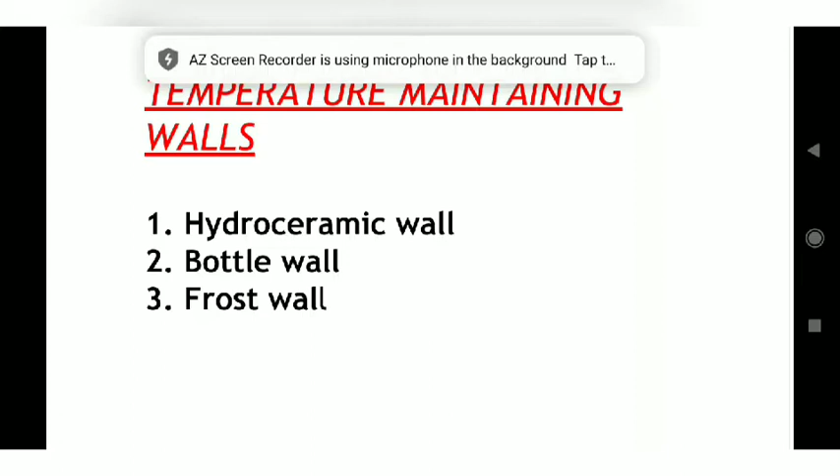We are going to discuss temperature maintaining walls. We are mainly going through three topics: first is hydroceramic wall, second bottle wall, and third is frost wall. First, we are moving through hydroceramic wall.

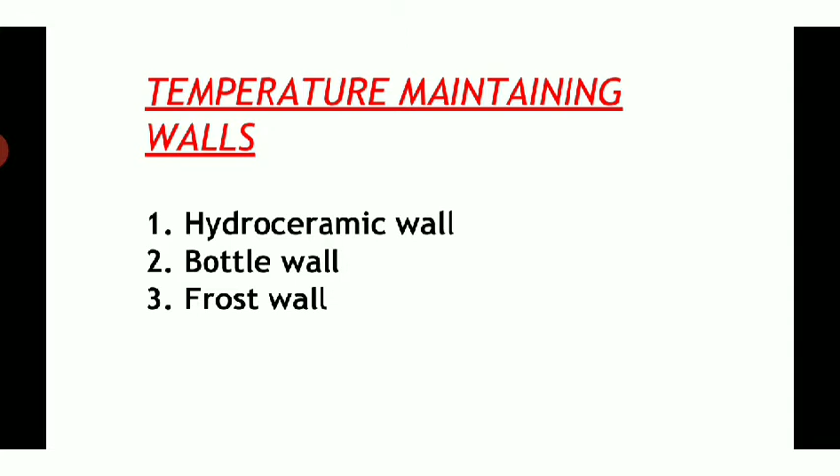We know that in our day-to-day life, the temperature is increasing due to the lack of rain, trees, etc. So the cooling of buildings is a big task for engineers. So hydroceramic wall is one of the best solutions for the cooling of buildings.

Hydroceramic is developed by IAAC, the Institute of Advanced Architecture of Catalonia. It consists mainly of three students, girls: Akanksha Rathee, Elena Mitrofanova, and Markopoulou.

The first point is, as I told earlier, it is speculated on thermodynamic process in buildings with the help of hydrogel. Hydroceramic requires mainly smart material and supporting material. Smart material like hydrogel, and supporting material like fabric as water channel and ceramic material.

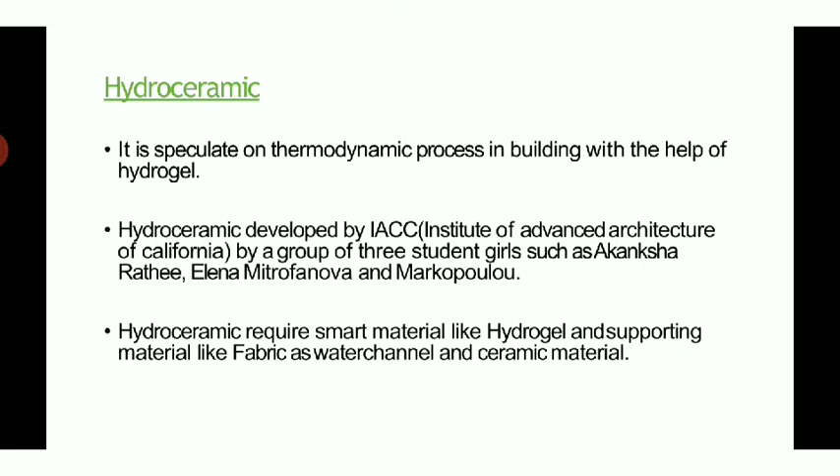First we want to know what is hydrogel. Hydrogel is a polymer which expands in water to 400 times its volume. So it consists of 98% water. It is very helpful for evaporation and it cools down the surroundings. There is a pictorial representation of hydrogel shown below.

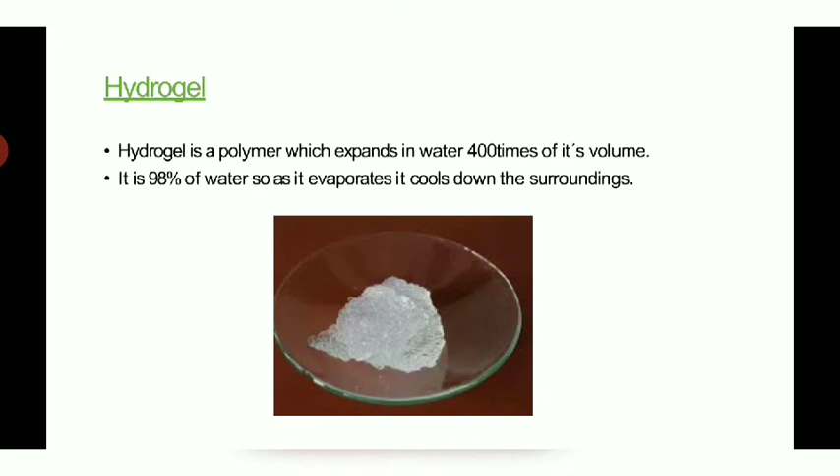Then we said that we need a ceramic material for the supporting material. So which ceramic material is suitable for the hydroceramic wall? That is a big question. Before that, there is a pictorial representation showing the heat of vaporization of water, which is about 0.6 kilocalories per gram.

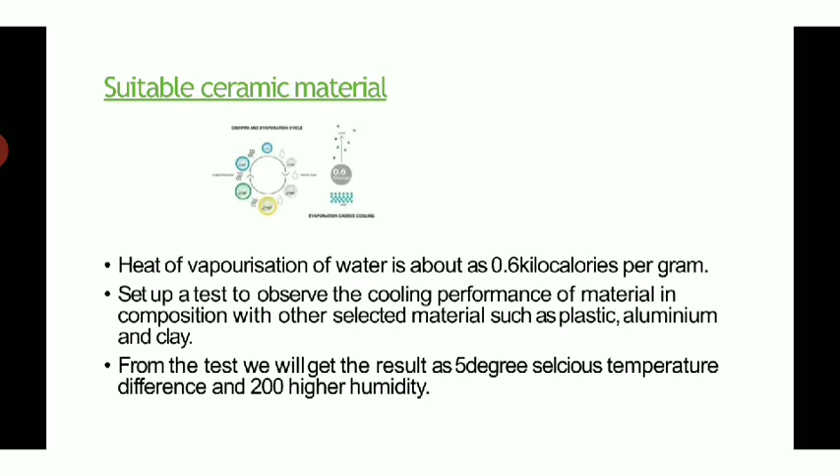Then we want to know which ceramic material is suitable. For that, we can conduct a test using materials like plastic, aluminium, and clay. After the test, we can identify a 5 degree Celsius temperature difference and 200% higher humidity. So by using composite material, we can understand that it has the ability to cool down the space and to transfer humidity.

So when we approach the composite material, we need the most abundant composite material in nature at cheap cost. When we approach it like that, we can easily prefer clay for the ceramic material.

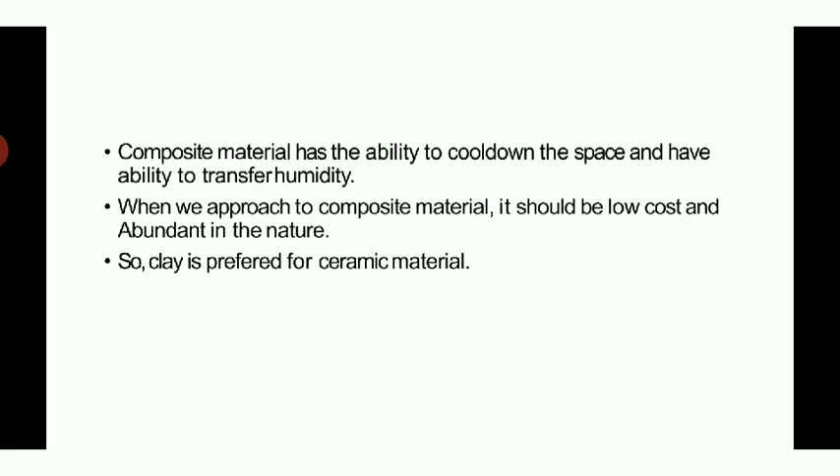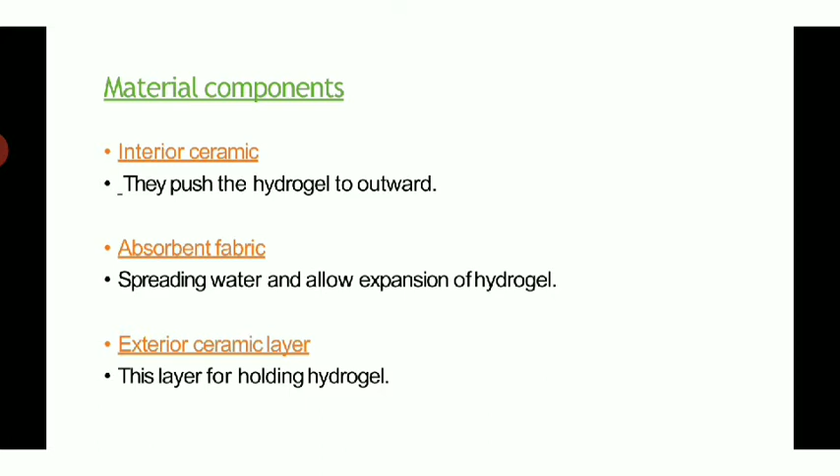Why are they needed? That is told here. The interior ceramic layer is helpful to push the hydrogel outward. The absorbent fabric helps spread the water and allow expansion of the hydrogel. The exterior ceramic layer holds the hydrogel.

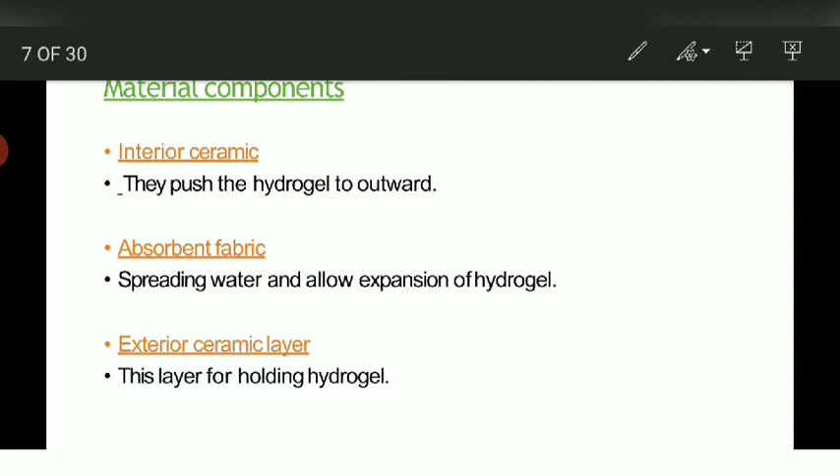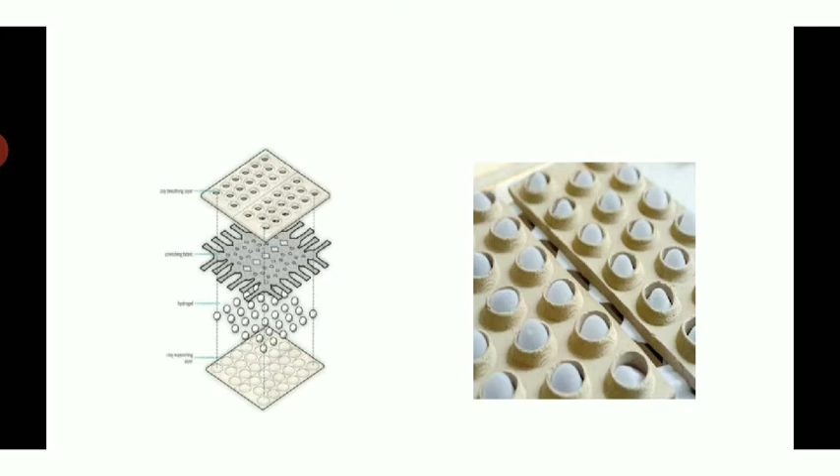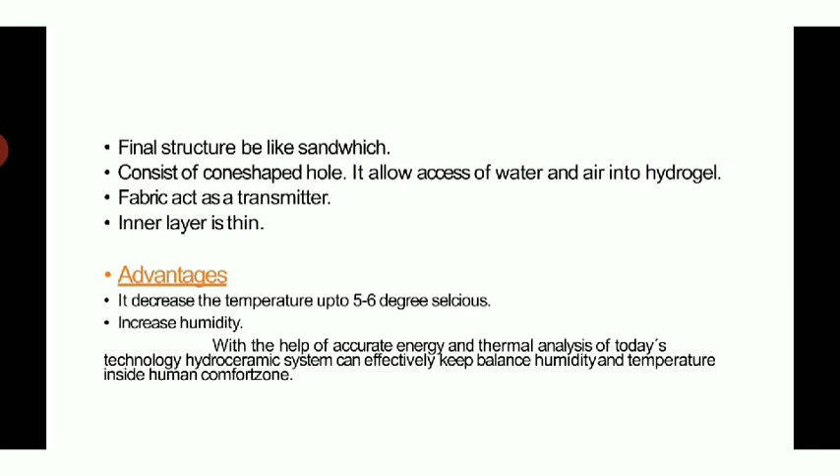When we look at the pictorial representation, we can say it is like a sandwich - the final prototype is like a sandwich, as I told in the first point of this slide. The fabric acts as a transmitter, and the inner ceramic layer is very thin.

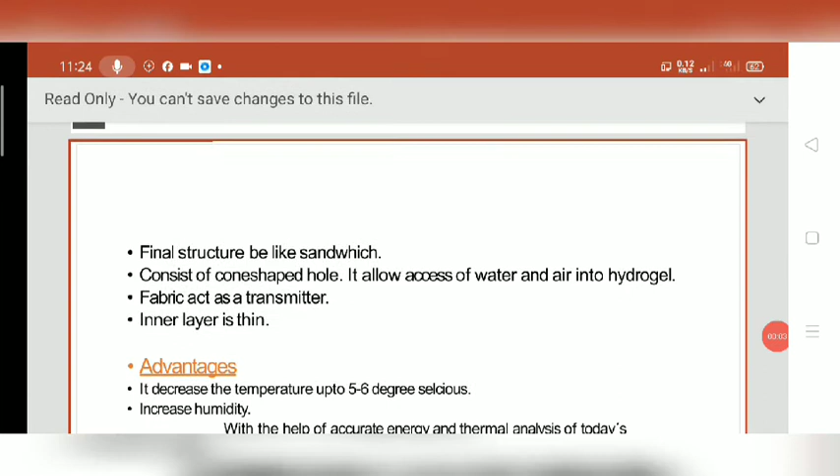The advantages of the hydroceramic wall: it decreases the temperature up to 5 to 6 degrees Celsius, and second, it increases the humidity. With the help of accurate energy and thermal analysis using today's technology, the hydroceramic system can effectively keep balanced humidity and temperature inside the human comfort zone.

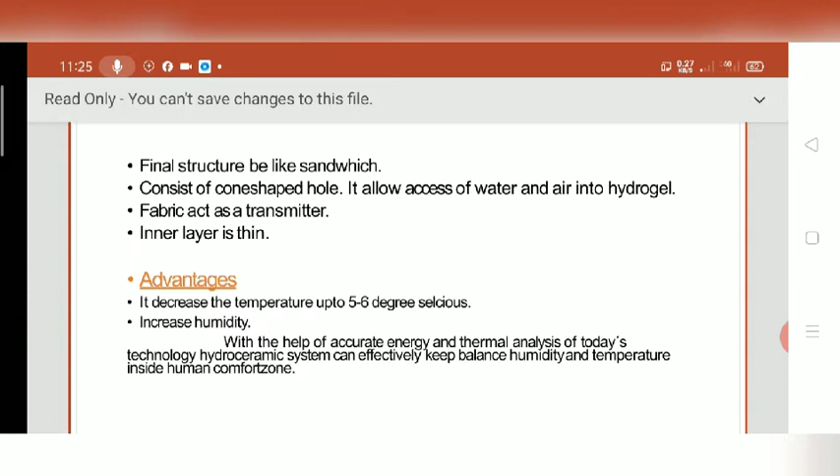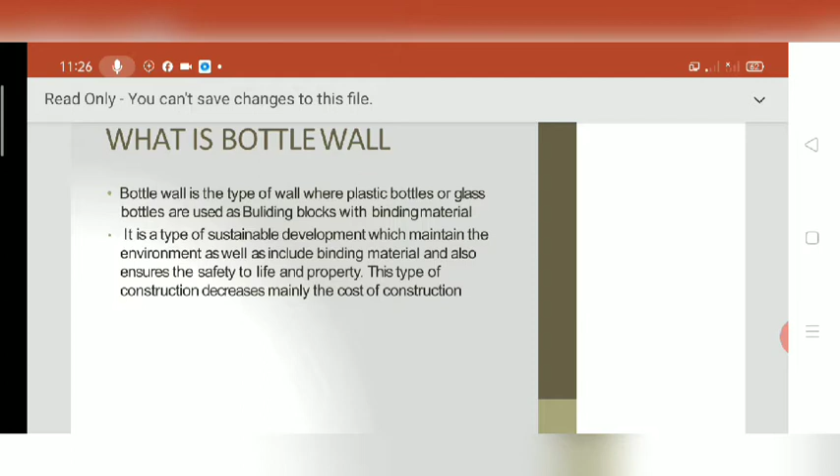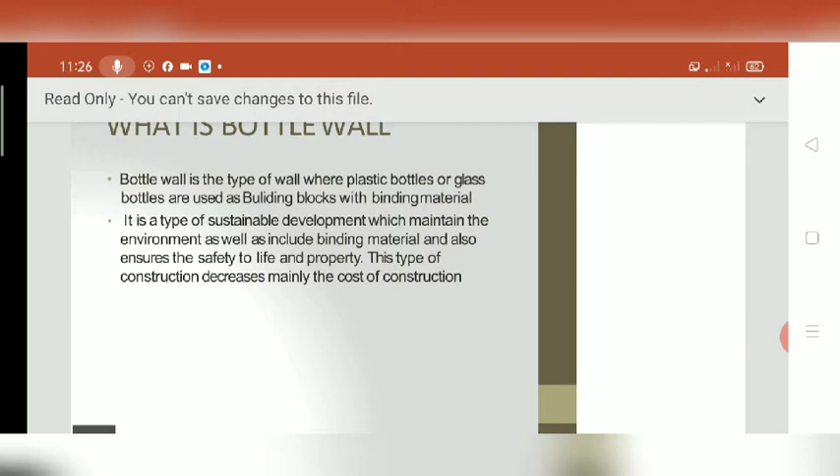It is a type of sustainable development which maintains the environment as well as includes binding material, and also ensures the safety of life and property. This type of construction mainly decreases the cost of construction.

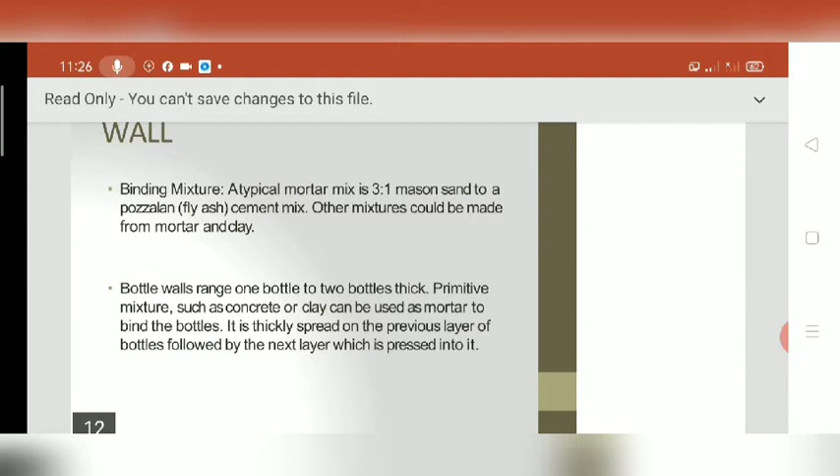Construction of bottle wall: binding mixture. A typical mortar mix is 3:1 mason sand to a pozzolan (fly ash) cement mix. Other mixtures could be made from mortar and clay.

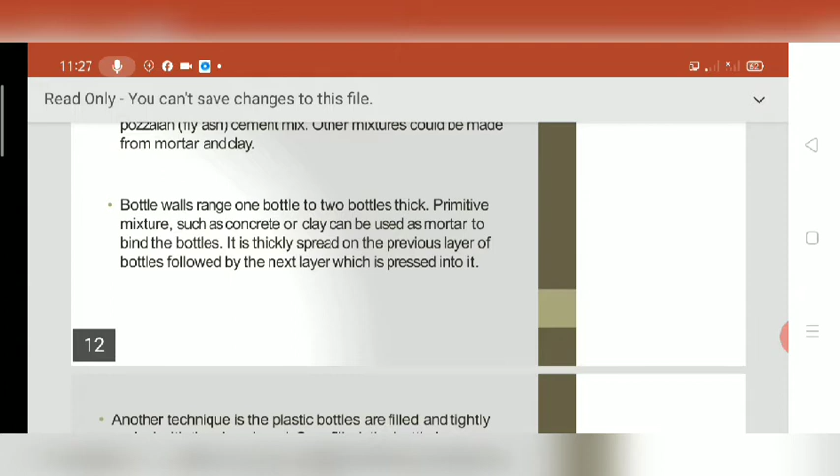Bottle walls range from 1 bottle to 2 bottles thick. Primitive mixtures such as concrete or clay can be used as mortar to bind the bottles. It is thickly spread on the previous layer of bottles, followed by the next layer which is pressed into it.

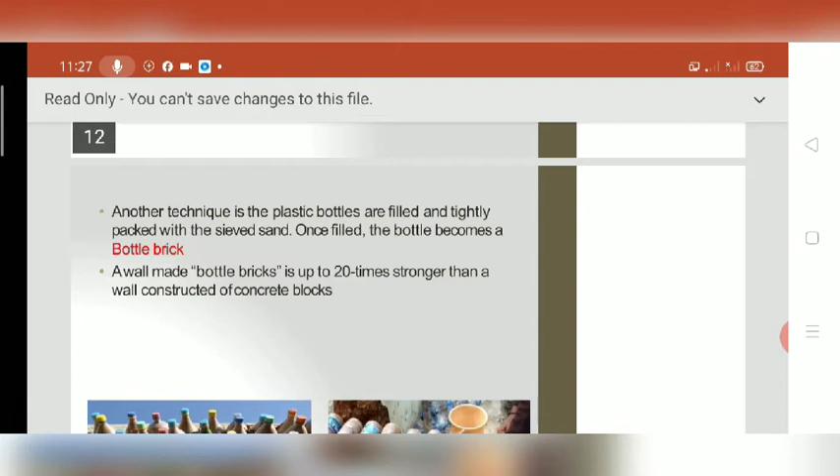Another technique is that plastic bottles are filled and tightly packed with sieved sand. Once filled, the bottle becomes a bottle brick. The sieved and filled bottles are called bottle bricks. A wall made of bottle bricks is up to 20 times stronger than a wall constructed of concrete blocks.

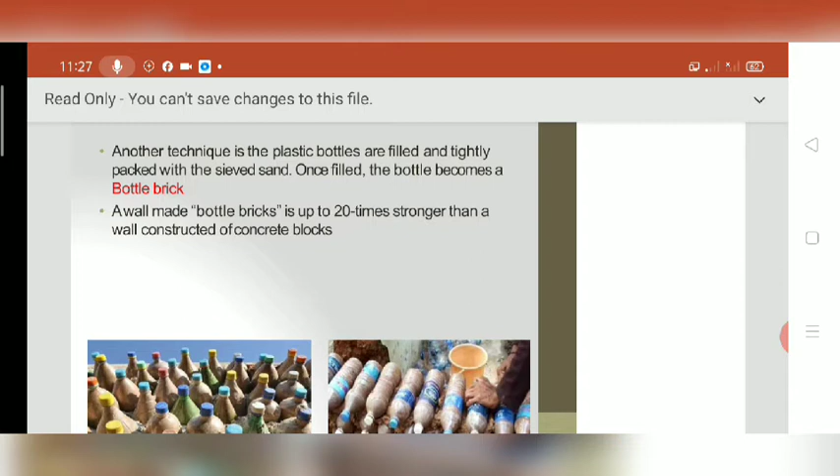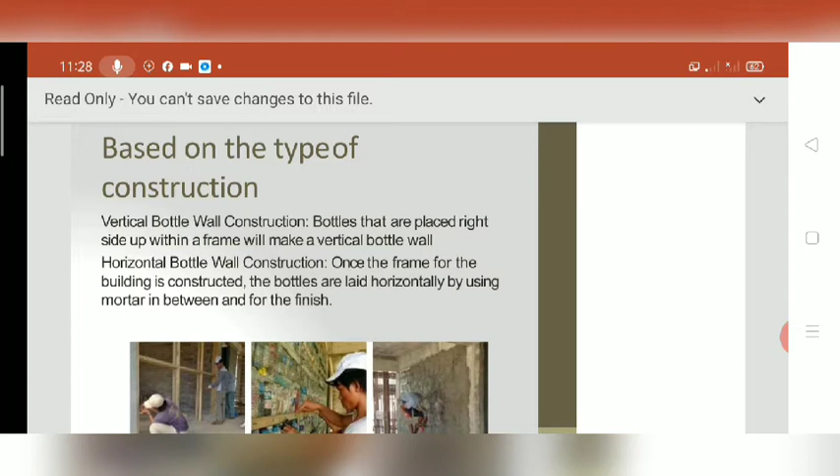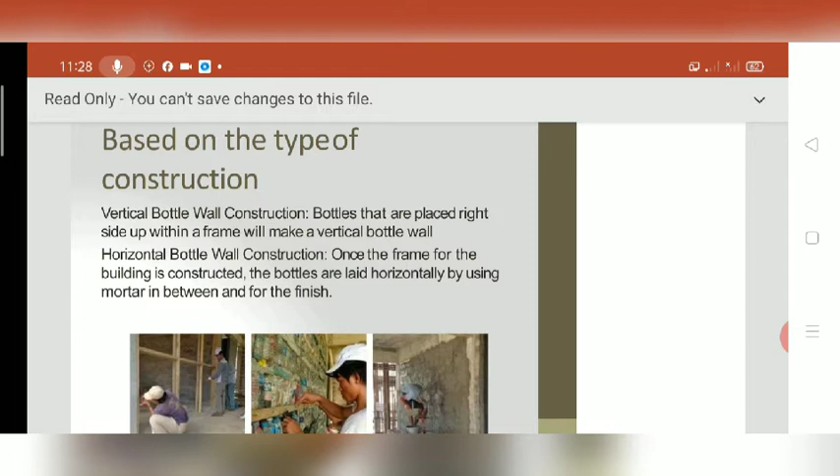Next, the classification. Based on the type of construction, bottle walls are classified into two: vertical bottle wall construction and horizontal bottle wall construction. In vertical bottle wall construction, bottles placed right side up within a frame make a vertical bottle wall. In horizontal bottle wall construction, once the frame for the building is constructed, the bottles are laid horizontally using mortar in between and for the finish.

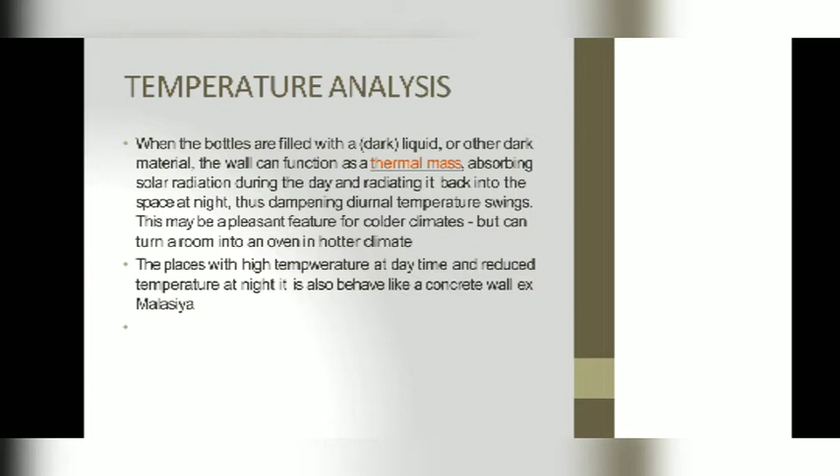Normally the bottles are filled with sand. In this kind of bottle wall construction, it will also act similar to a concrete wall. For example, in places with a high temperature at daytime and a reduced temperature at night time, similar to how a concrete wall behaves, the bottle wall behaves the same way.

Advantages over bricks: the first advantage of bottle wall construction is low cost. It is a low cost construction. Cost of a plastic or glass bottle is very less compared to brick or concrete block, and it has a very good aesthetic view.

When we consider a plastic bottle, it is non-brittle and absorbs abrupt shock load, and it is a bioclimatic material. Bottle walls are made of bioclimatic materials, meaning plastic and glass bottles etc. are bioclimatic materials, which means they have an efficient way of energy usage.

And when we compare to concrete wall construction or brick wall construction, less construction material is needed in bottle wall construction.

A more efficient way than recycling plastic is the reuse of plastics, meaning waste bottles can be used as a building material. By this method, waste management is also done.

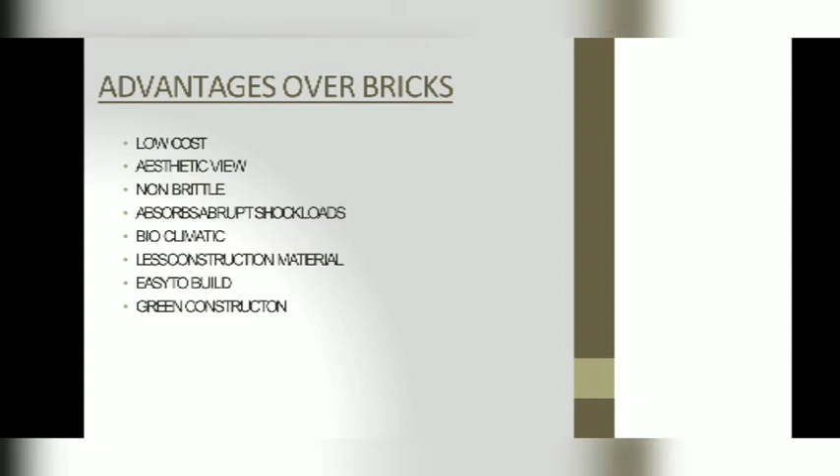Disadvantages of bottle wall construction: first, plastic is an undecomposable and indestructible material. Next, when plastic is melted, it releases a harmful gas, for example carbon monoxide, etc.

It is harmful for both health and the environment. Plastic is mainly made from oil, which may lead to a shortage of oil in the future.

And if we use glass bottles in construction, glass bottles may break during the construction, which may cause accidents.

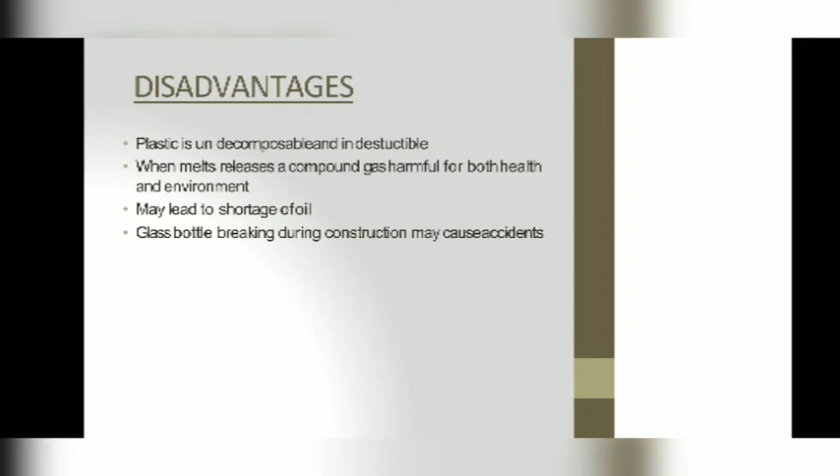Frost walls are insulated walls constructed around the periphery of the foundation and also constructed above the ground in the interior of the building structure. This acts as insulation to maintain the warmth of the building.

Due to this, the foundation may dislocate upward; there will be a swelling upward. This process is called frost heave. When, on the other hand, the temperature increases, the ice lenses change back into water, the volume decreases, and the dislocation of the foundation happens again, but in the opposite direction.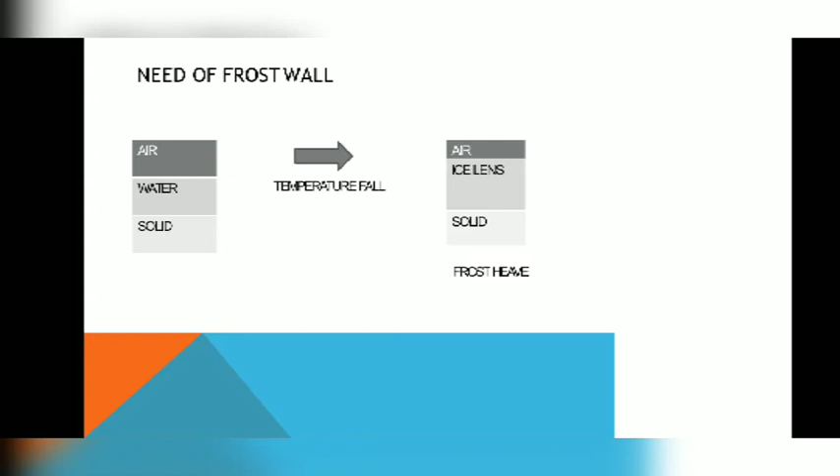Frost heave is an upward swelling of soil due to the formation of ice during freezing conditions. It usually occurs when the freezing temperature penetrates the soil and turns the present moisture into ice, thereby generating an upward movement in the soil.

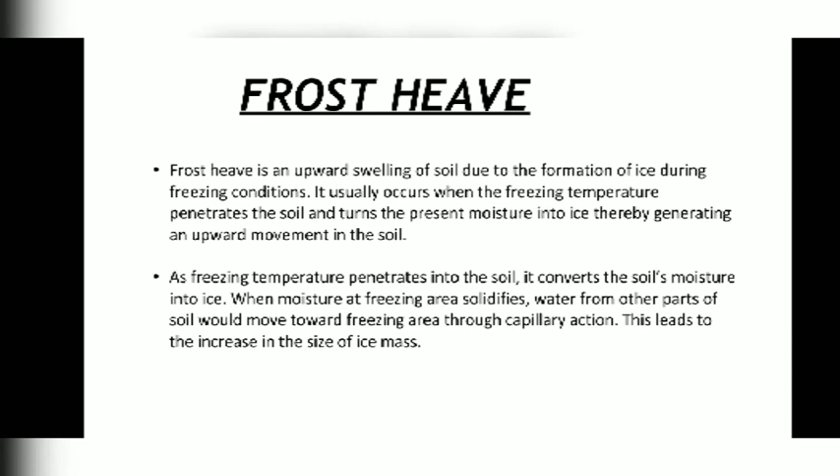As freezing temperature penetrates into the soil, it converts the soil moisture into ice. When the moisture at the freezing area solidifies, water from other parts of the soil moves towards the freezing area through capillary action. This leads to an increase in the size of the ice mass. Soil weight and other objects above restrain ice size growth, and consequently ice lenses are formed.

It is reported that when the moisture in the soil is converted into ice, its size may increase by 9%. And as we already discussed, when temperature declines...

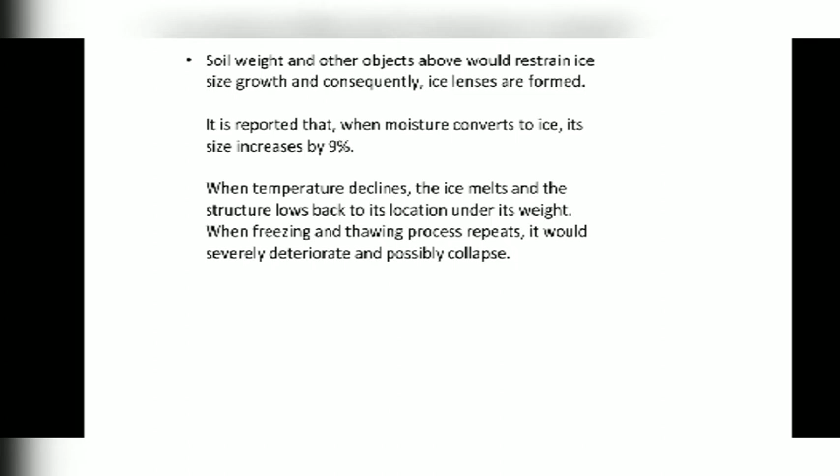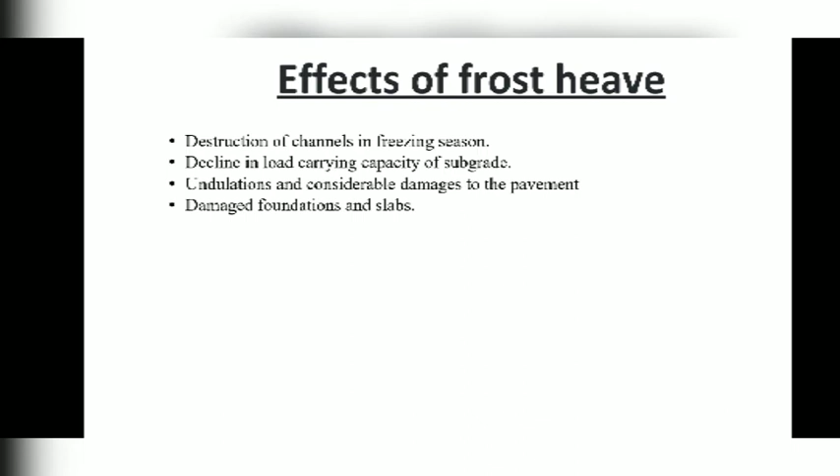Next, the effect of frost heave. The main effects of frost heave are destruction of channels in a freezing season, decline in load carrying capacity of subgrade, undulations and considerable damage to the pavement, and damaged foundations and slabs.

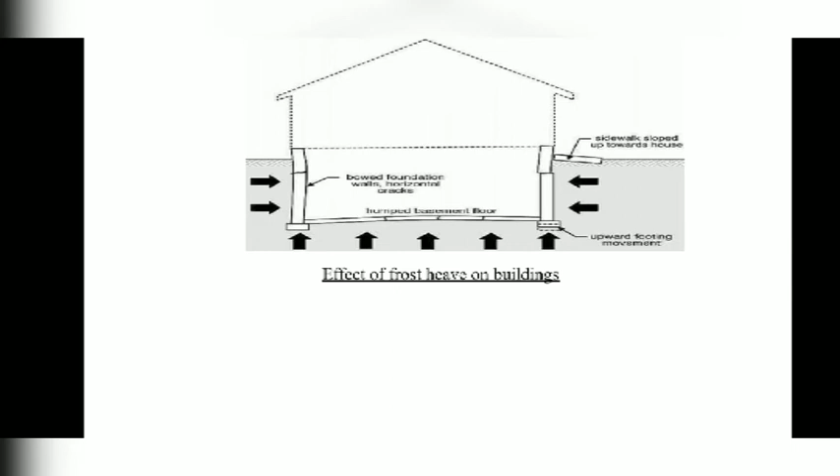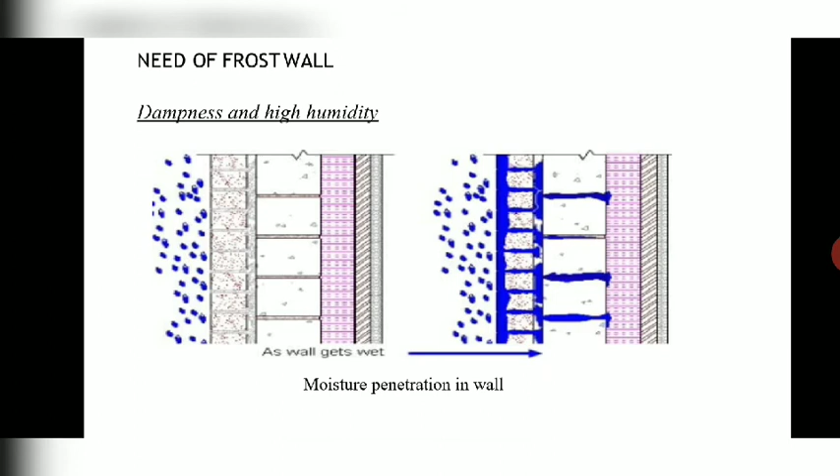The other reason for the need of a frost wall is dampness and high humidity. The figure shows how moisture penetrates into the walls as they get wet. This weakens the wall, loses the aesthetic beauty of the building, and even harms the health of the occupants.

Usually moisture enters our building through the foundation. Evaporation of moisture causes an increase in humidity. When warm air meets cold air, condensation occurs, and the moisture sticks on the walls or windows, sometimes in the form of frost. Thus, the frost wall becomes necessary.

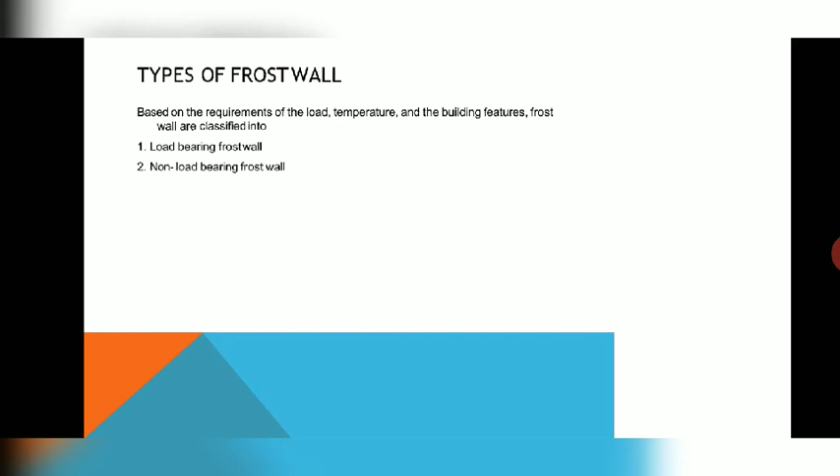Now let's see the types of frost walls. They are classified into two categories based on criteria like loading, temperature, etc. The two categories are load-bearing frost wall and non-load-bearing frost wall.

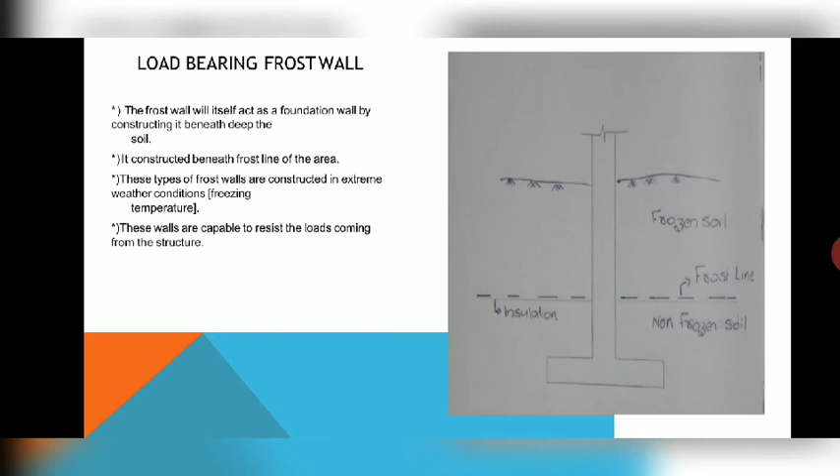Load-bearing frost wall: as the name indicates, these frost walls are capable of carrying loads. They are only constructed during extreme freezing temperatures, in places where soil freezes and water in the soil converts to ice, so that frost heave occurs, as discussed in the earlier slides.

To resist this, load-bearing frost walls are constructed beneath the foundation and beneath the frost line. The frost line is the depth to which the soil freezes. In the figure, we are not providing any vertical insulation, only horizontal insulation of frost walls is provided.

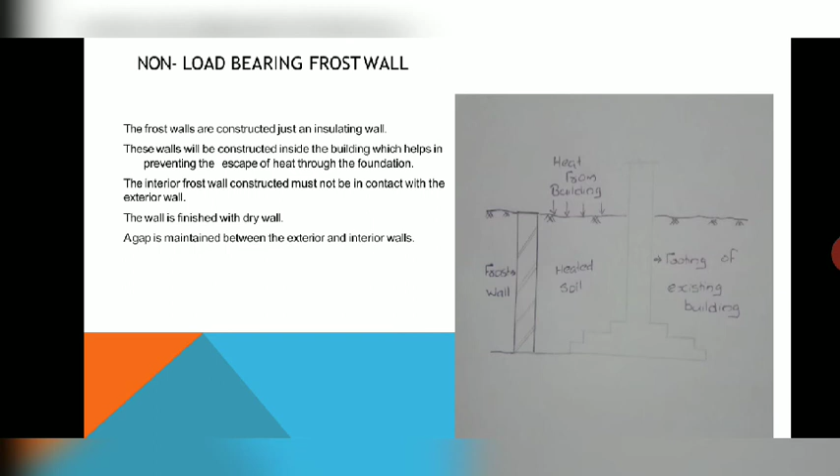Now moving to the next type of frost wall: non-load bearing frost walls. These are constructed just like an insulating wall. They are not capable of bearing load, and are constructed on the periphery of the foundation like interior walls, provided as vertical walls as shown in the figure.

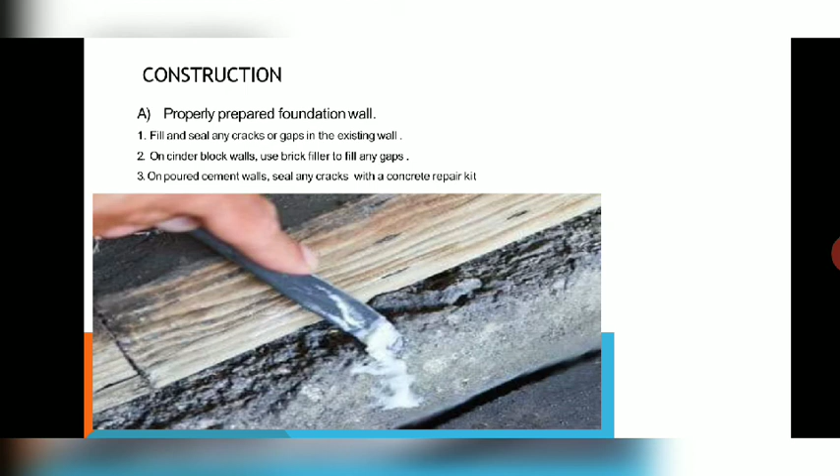Now let us see the construction of a frost wall. The first step is to prepare a properly prepared foundation wall, meaning there should be no cracks or gaps in the foundation wall or existing walls. Walls made of cinder blocks should use brick fillers to fill the gap, and walls of poured cement should use a concrete repair kit, so that penetration of moisture is prevented.

Now we need a sturdy frame, meaning a rigid frame. A frame of 2x4 or 2x3 inch lumber is used for this purpose. The top plate and bottom plate have a width equal to the width of the wall. Vertical studs should be used to connect the top and bottom plates, with a height equal to the height of the wall minus 3 inches to accommodate the plates. These studs are placed at a spacing of 16 inches.

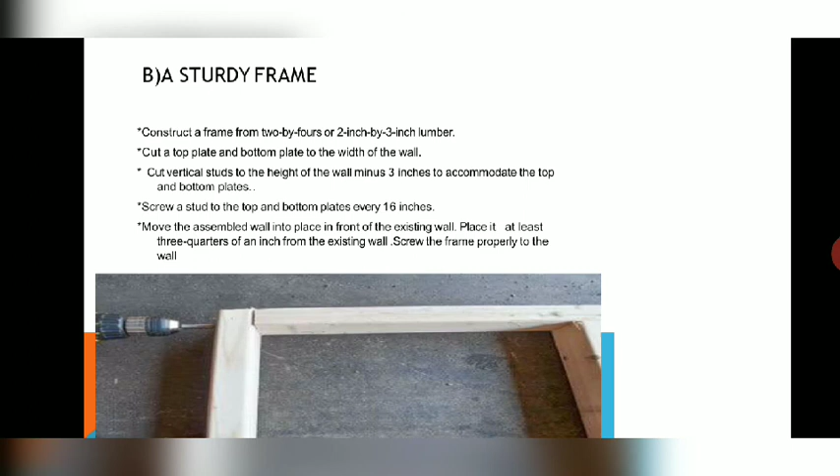Now the whole assembly is moved in front of the existing wall, and from the existing wall it should have a distance of at least 3/4 inch. Then these are screwed to the wall.

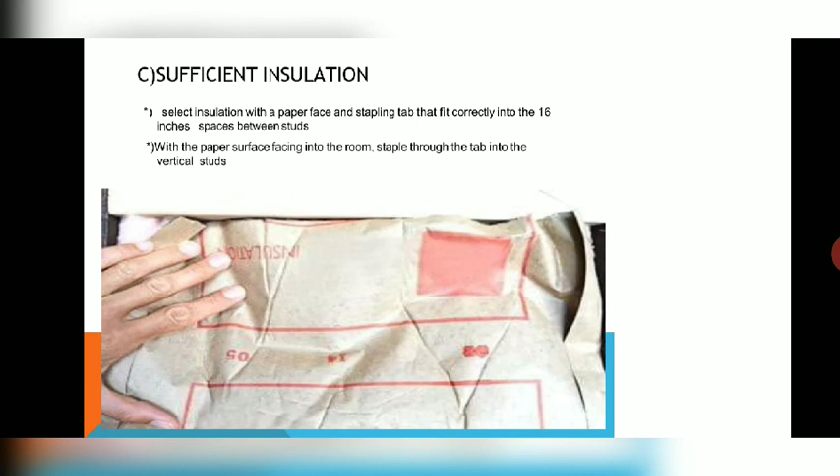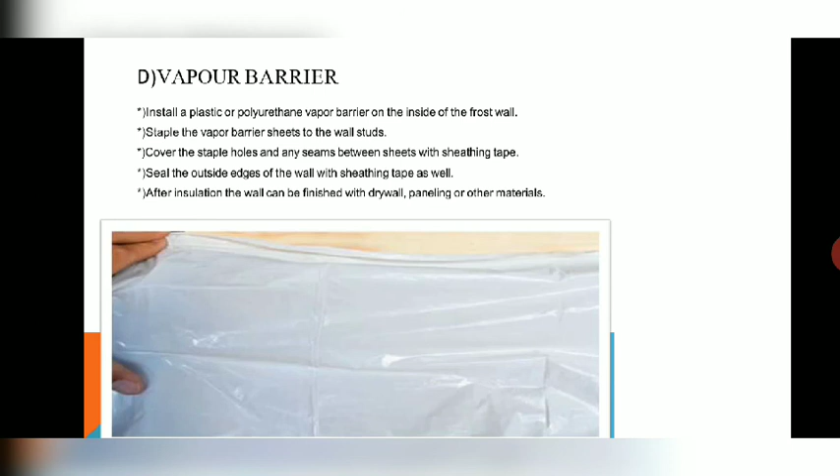The next step is to provide sufficient insulation. For this, paper-faced insulation is required, which is stapled to fit the 16-inch spacing between the studs, with the paper surface facing the room.

The next step is to provide vapor barriers. Plastic or polyurethane vapor barriers are used for this, placed inside the frost wall and stapled to the wall studs. Any holes or seams present are covered with sheathing tape. Finally, the wall is finished with drywall, paneling, or other materials.

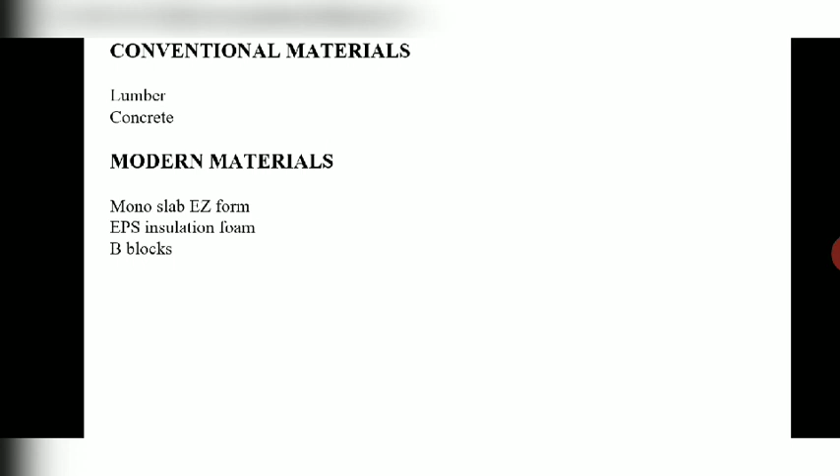In the olden days, the materials used for frost walls were lumber and concrete. But nowadays, we get precast materials from companies who have patents for these materials, like monoslab, EZ form, EPS insulation foam, B blocks, etc. These are brought from the market and directly used in the field. EPS insulation means expanded polystyrene products.

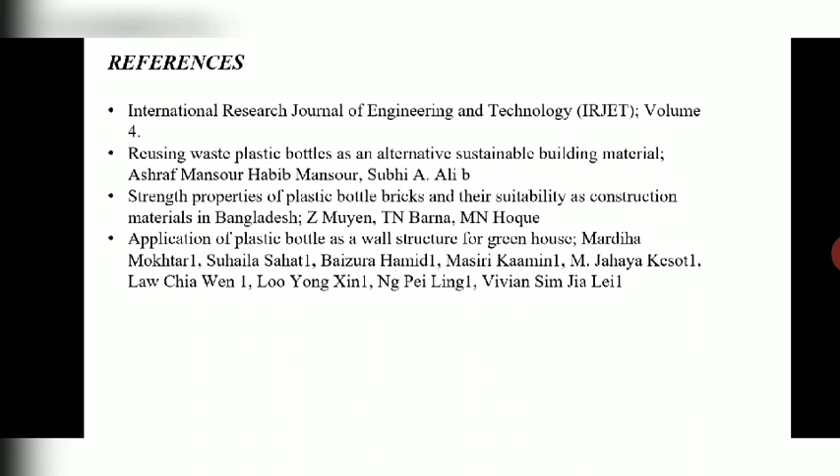So we hope all of you understood the concept of our topic, temperature maintaining walls. Thank you.